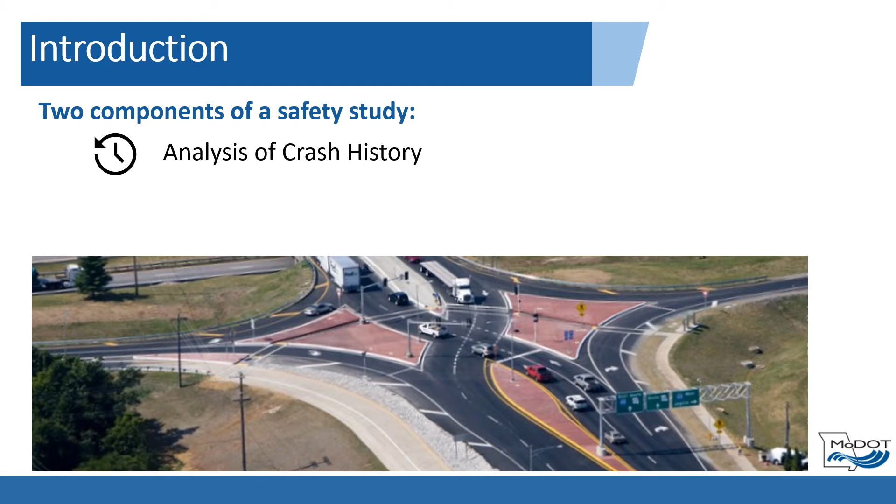There are two components of a safety study: an analysis of the roadway's crash history, and an estimation of future crashes.

The focus of this module is on estimating future crashes with an emphasis on utilizing safety models.

The following guidance is intended to serve as a resource for practicing MoDOT project managers and consultants when completing or reviewing TIAs when a future crash safety model component is included.

Reviewing TIAs when a future crash safety model component is included. These guidelines are consistent with the department's traffic safety standards of practice.

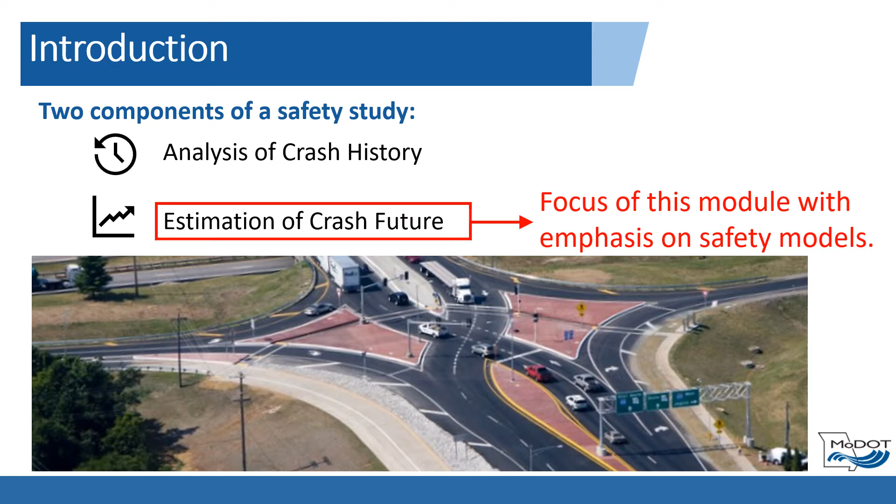Predictive safety analysis models are sometimes needed because historical crash data is not always available for TIAs.

Existing data may not apply to future conditions, especially for new construction projects, and an evaluation of impacts from proposed geometric or traffic volume changes is needed.

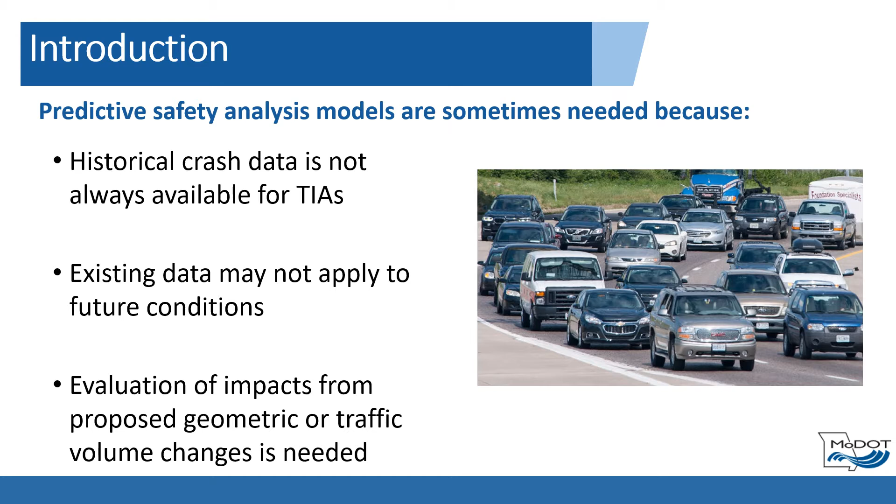The safety models in this module estimate future crashes by utilizing Part C of the latest version of the Highway Safety Manual, HSM. The HSM is based on estimating crashes as predicted or expected.

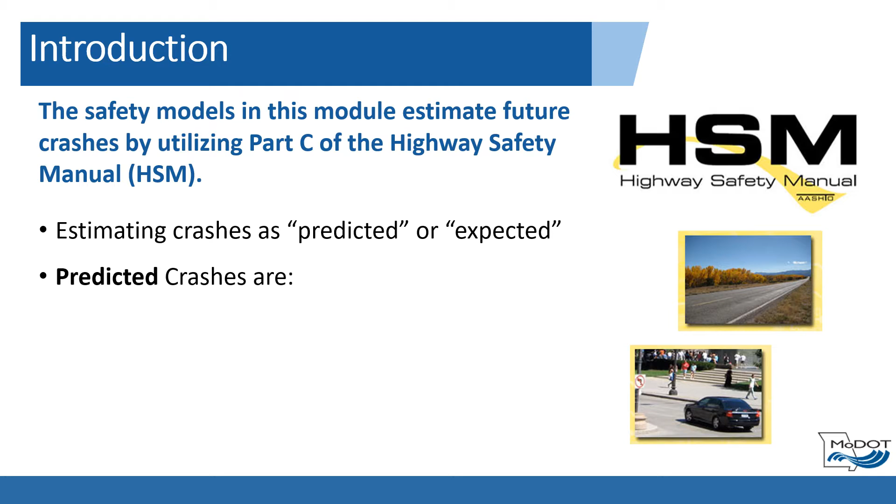Predicted crashes are based on the geometry, volume, and national patterns of crashes, and are calculated within these safety tools utilizing standard safety performance functions, known as SPFs.

Expected crashes are determined by adjusting the predicted crashes to include local crash history as a way to more accurately determine the modeled number of crashes.

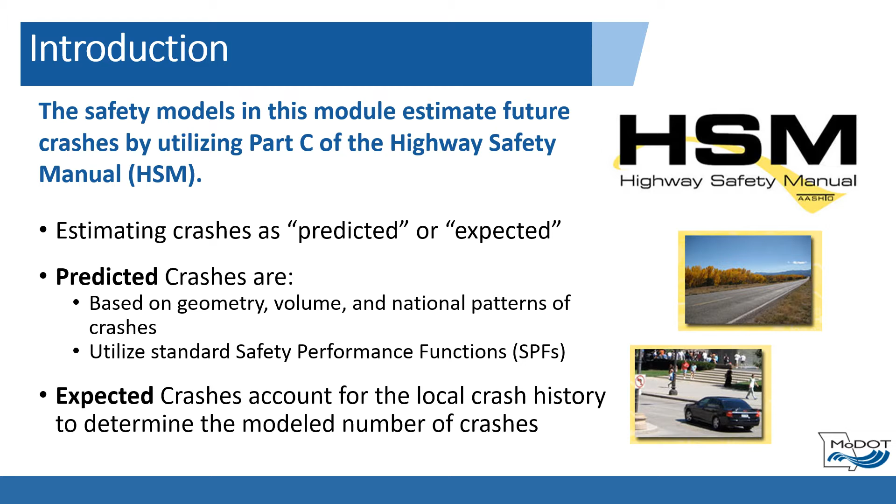Now that we've introduced estimating future crashes using safety models, let's discuss a few key safety models typically used by MoDOT. There are 4 safety models typically used by MoDOT.

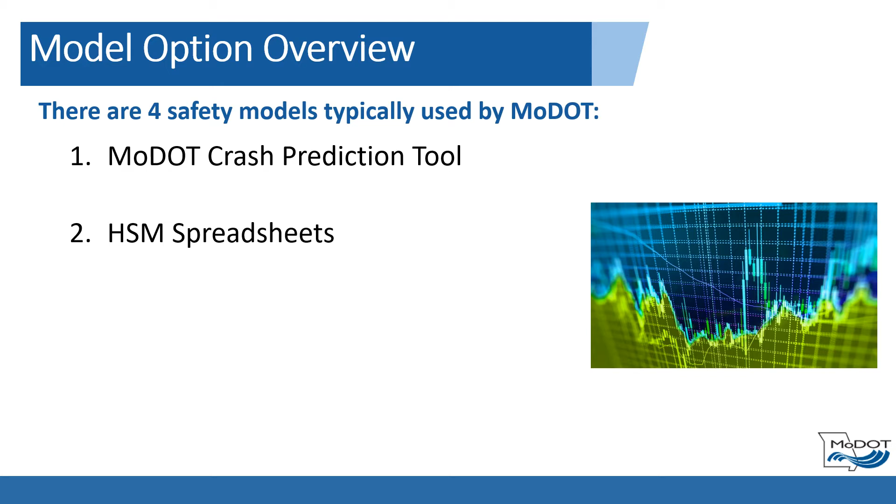MoDOT Crash Prediction Tool, HSM Spreadsheets, Interchange Safety Analysis Tool Enhanced (ISATe), and Interactive Highway Safety Design Model (IHSDM).

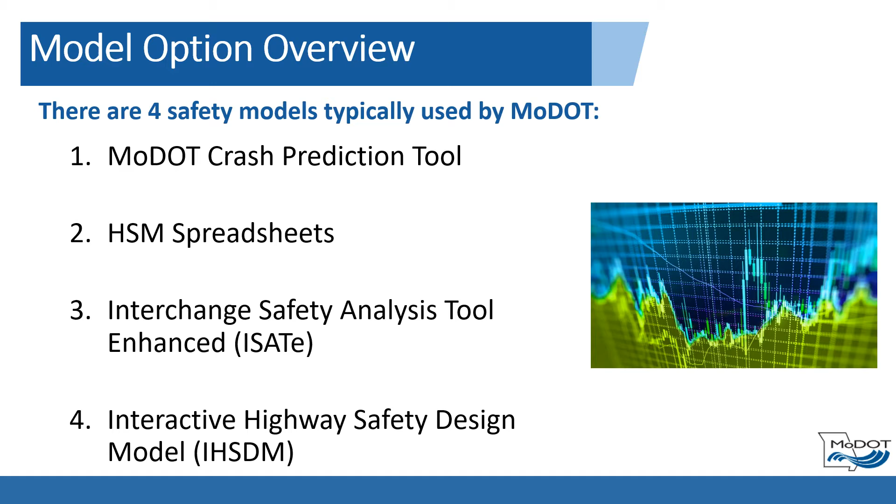The Crash Prediction Tool developed by MoDOT is available for internal MoDOT use only at the time of this publication. It allows for the analysis of rural 2-lane highways only and provides the potential for safety improvements within a corridor.

This is important because locations that could yield a high return on safety investments can be identified. For more information, discuss with MoDOT.

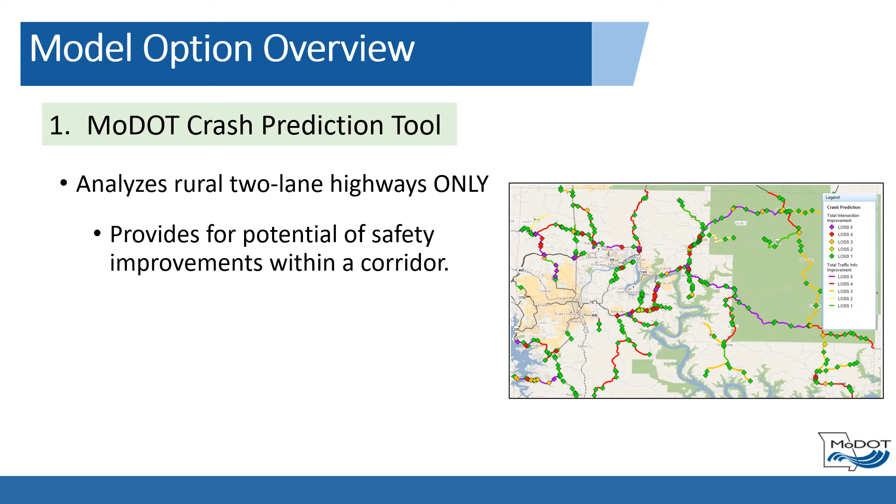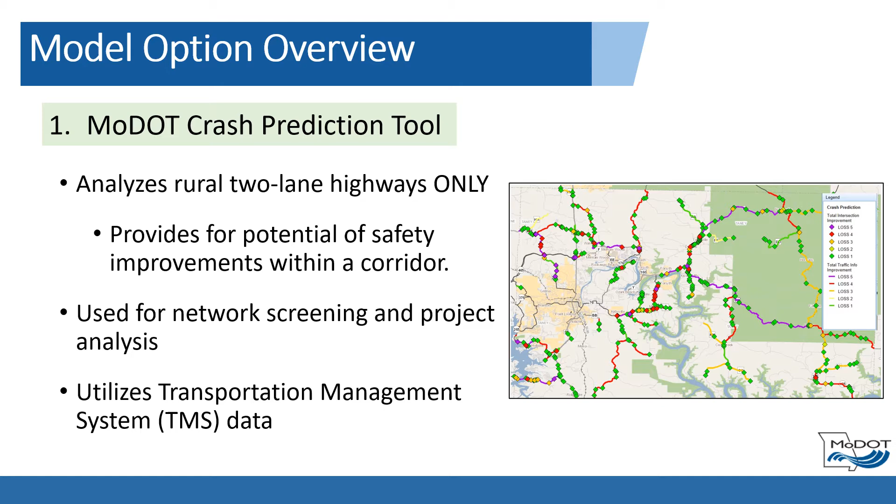The tool can be used for network screening and project analysis, and it utilizes Transportation Management System, TMS, data. The MoDOT Crash Prediction Tool also automates the analysis utilizing the HSM for the selected corridors.

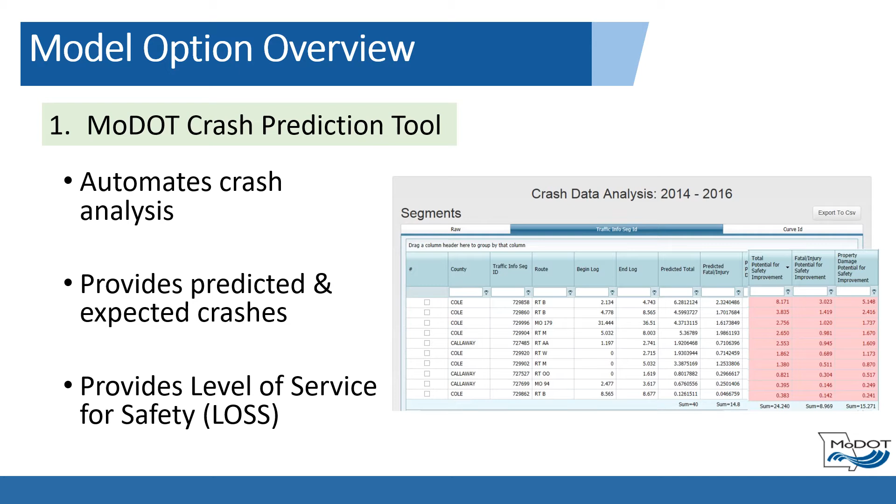So that it provides both predicted and expected crashes, and it provides the level of service for safety, LOSS. The HSM Spreadsheets provide high-level overviews of the expected and predicted number of crashes within a study corridor.

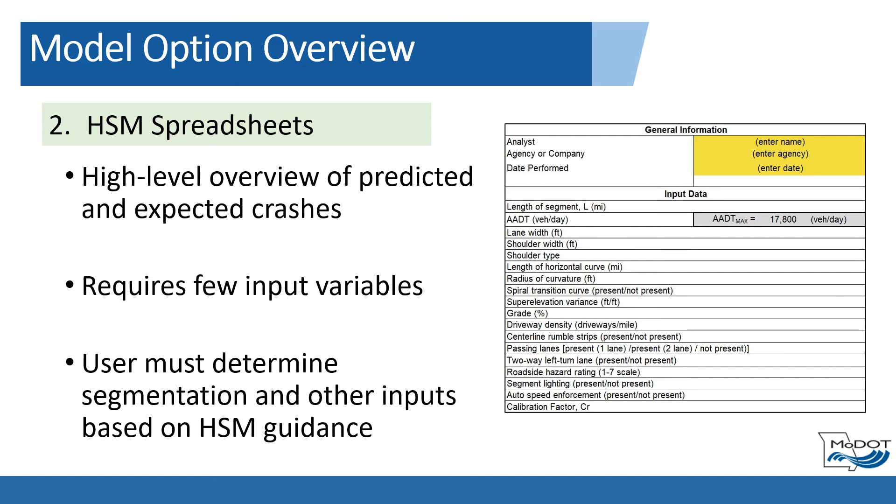These segments should be no less than 0.1 miles to minimize calculation efforts and not affect the results. Roadway segments begin and end at the center of intersections or where the roadway segment changes.

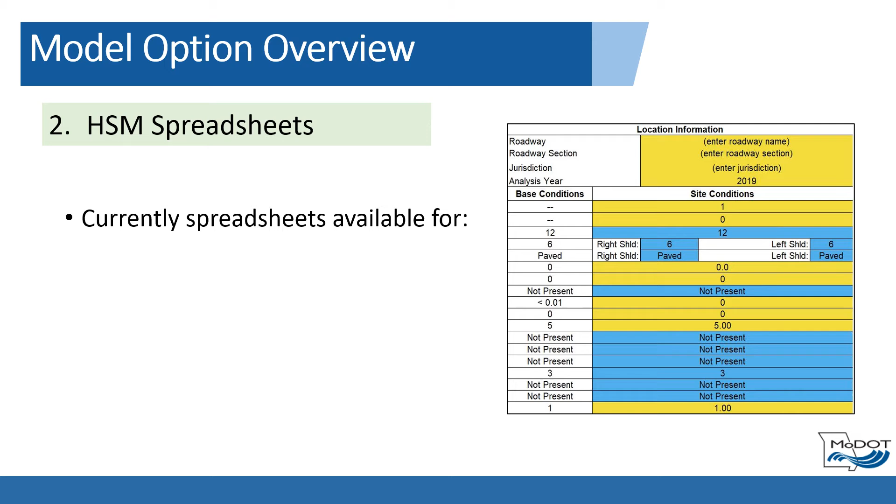Currently, various spreadsheets have been developed by different sources. As of the date of this material, there are spreadsheets available for rural 2-lane highways, multi-lane highways, and urban or suburban arterials.

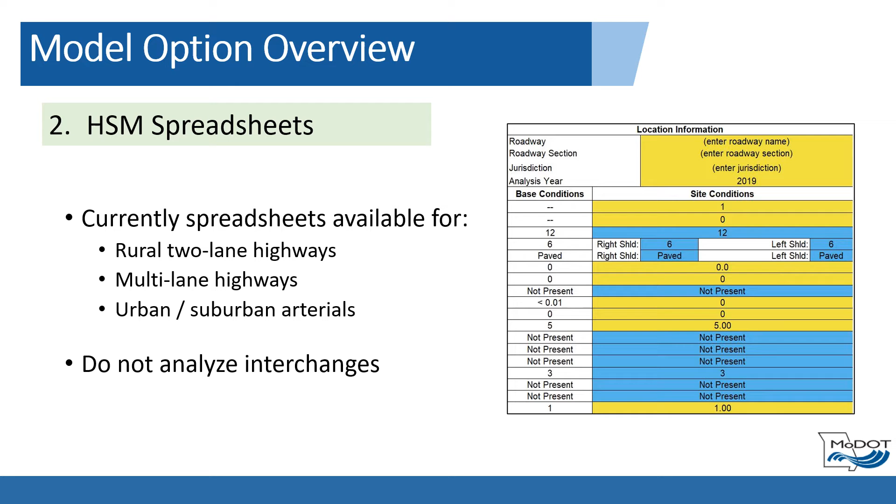HSM spreadsheets do not analyze interchanges.

ISATe, described in HSM chapters 18 and 19, is a specialized spreadsheet analysis tool that was developed to analyze freeways. This includes the freeway segments, ramps, ramp terminals, and speed change lanes that comprise a freeway.

ISATe requires more input variables than the HSM spreadsheets.

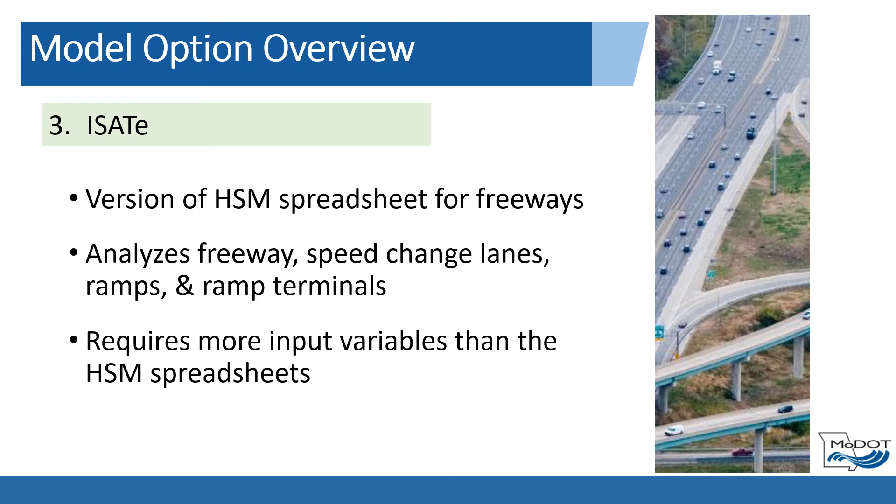ISATe can be used for most freeway corridor types, though certain situations may require another tool. The tool can be used in conjunction with other HSM spreadsheets if a local connecting road system needs to be analyzed as well.

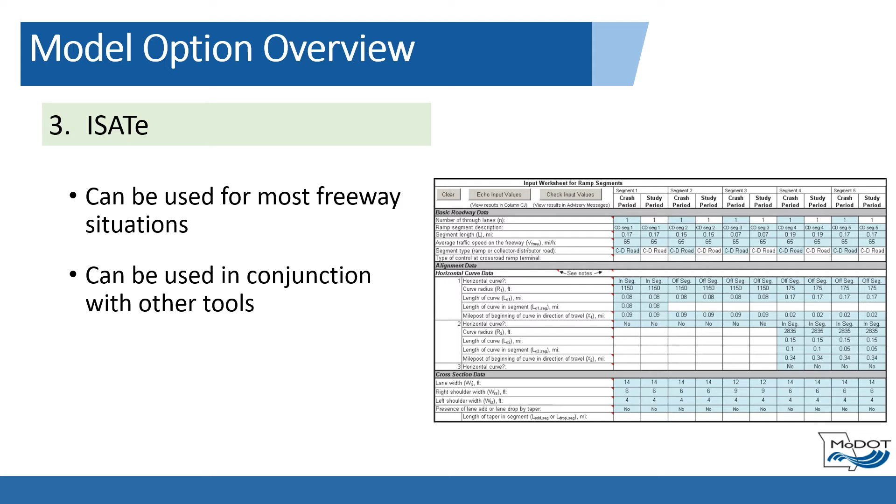Segmentation of the corridor utilizing ISATe requires the user to manually divide up the corridor for entry into the spreadsheet. Each segment should be uniform with respect to traffic volume, geometric design features, and traffic control features.

Key changes in characteristics such as the number of through lanes, lane width, shoulder, median width, ramps, or clear zone require a new segment to begin within the model.

More information can be found at the MoDOT EPG on ISATe, 905.3.6.2.5.

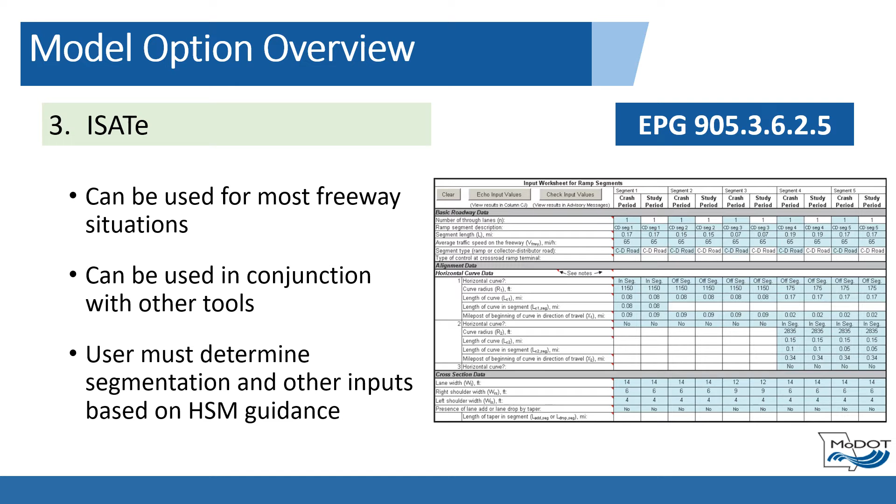IHSDM is a fully integrated safety modeling software with the capabilities of evaluating most types of facilities as an interconnected network. However, there are instances where HSM Part C does not apply to a real-world situation and cannot be modeled.

Refer to the HSM Part C. The tool requires a high number of user-defined input variables.

Using the HSM spreadsheets as the core function of the modeling software, the IHSDM automates the segmentation process and provides a visual representation of what is being modeled.

The user also has the option to import a LandXML file containing the horizontal and vertical alignment information for every roadway, which can greatly speed up the development and accuracy of the modeling output.

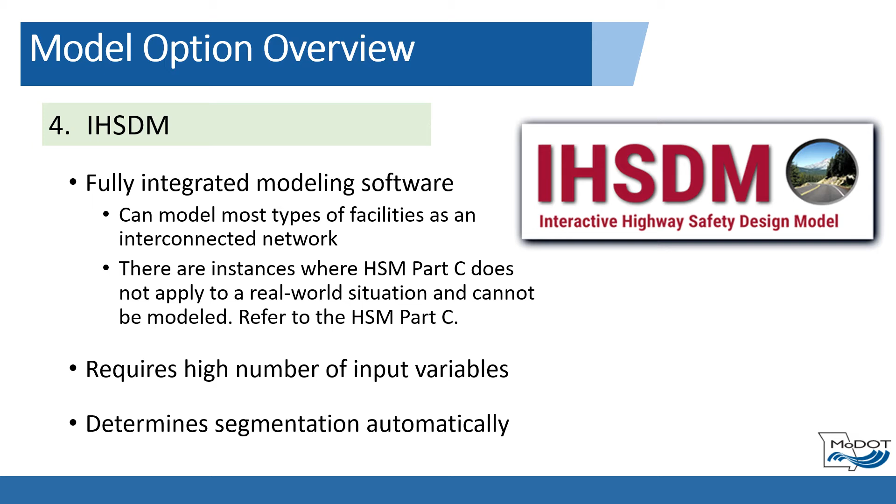Now that we've overviewed common safety models used by MoDOT, we can discuss where to find MoDOT calibration factors.

Parameters to be determined prior to completing an existing safety analysis include the following. MoDOT has a list of calibration factors that are available for reference in the MoDOT SharePoint library and are based on research documented on the MoDOT Research Publications website. The hyperlinks to these locations are available towards the end of this module under Additional Resources.

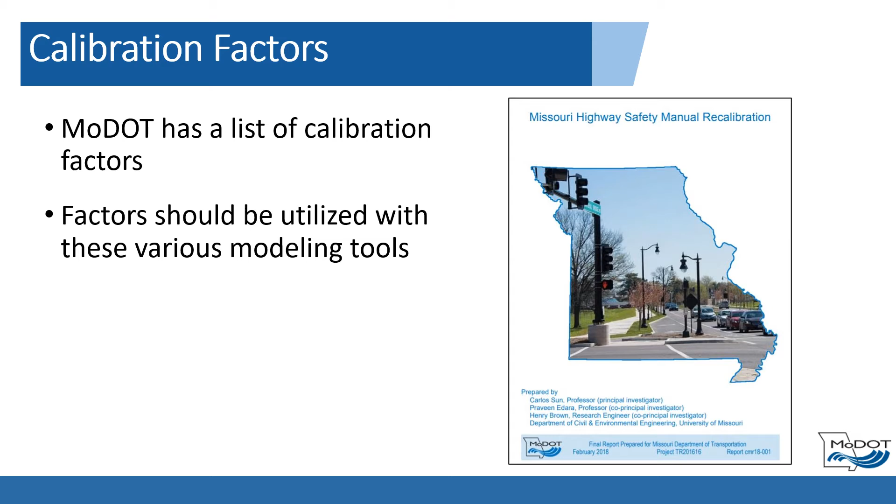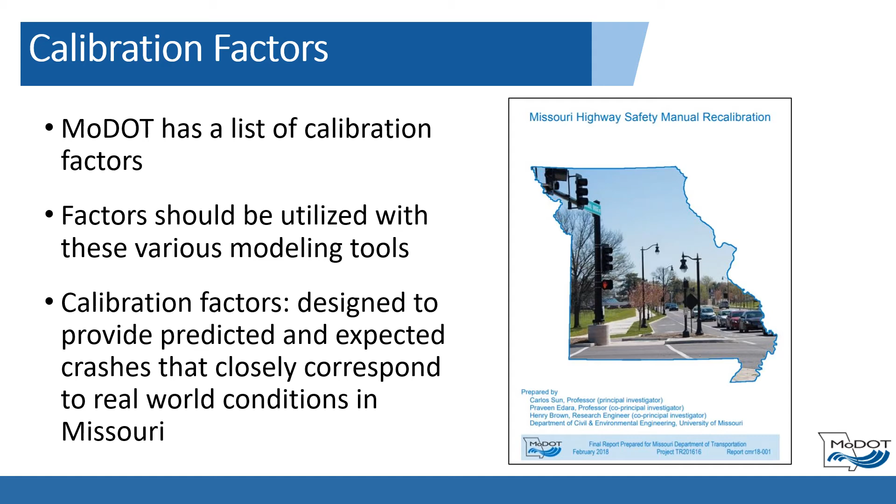The appropriate calibration factors should be utilized with these various modeling tools. The calibration factors have been selected to provide predicted and expected crashes that more closely correspond to real-world conditions in Missouri. Now that we've overviewed safety modeling calibration factors, we can discuss the typical analysis approach to overall safety modeling.

Various sources have developed each of these tools, though they all utilize the HSM to conduct their analysis. It is important to determine through consultation with MoDOT the appropriate tool and tool version for a specific project. The same version of the approved tool should be used throughout the entire course of the project, unless instructed to utilize another version by MoDOT.

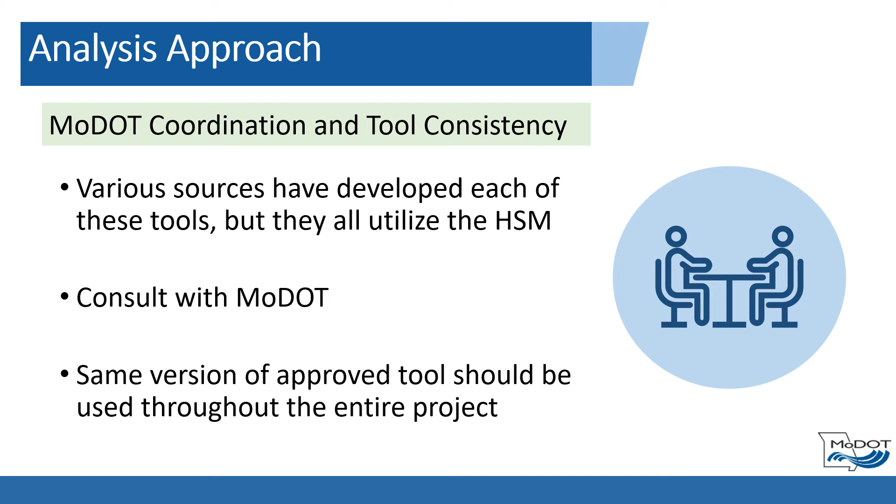Typically, the analyst should determine the future expected crashes and compare those to the existing expected crashes utilizing the appropriate modeling tool. This comparison approach allows for local crash characteristics to be taken into consideration when determining the effectiveness of proposed improvements. To determine the future expected crashes, the ratio of expected to predicted crashes under the existing condition should be determined and then multiplied by the number of future predicted crashes.

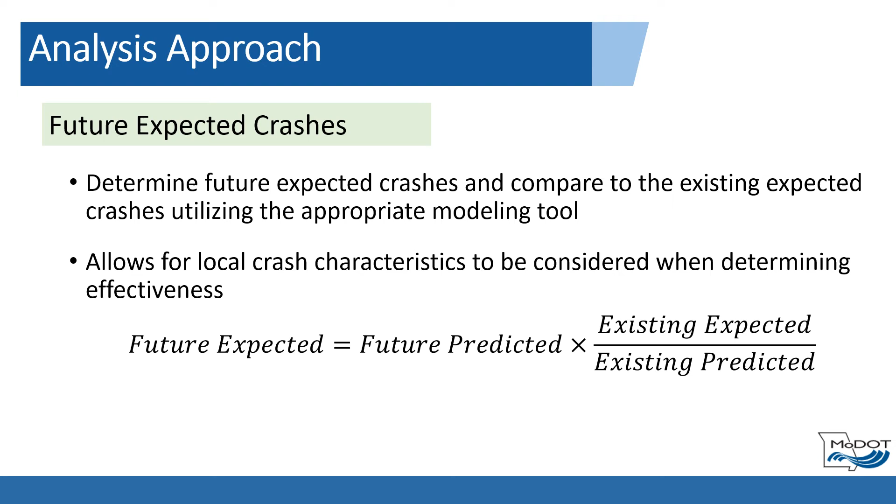This ratio can be utilized along with the future predicted crashes to extrapolate the future expected crashes. Professional judgment is needed to determine if one ratio is used for the entire project or if subparts of the project have and use separate ratios.

Note that the ratio method works well for roadway realignments or other adjustments that are factored into the HSM analysis tools. However, those do not account for all situations, such as enhanced signage or roundabouts. Refer to the Crash Modification Factor (CMF) module for additional information for anticipated crash changes for different transportation facility types.

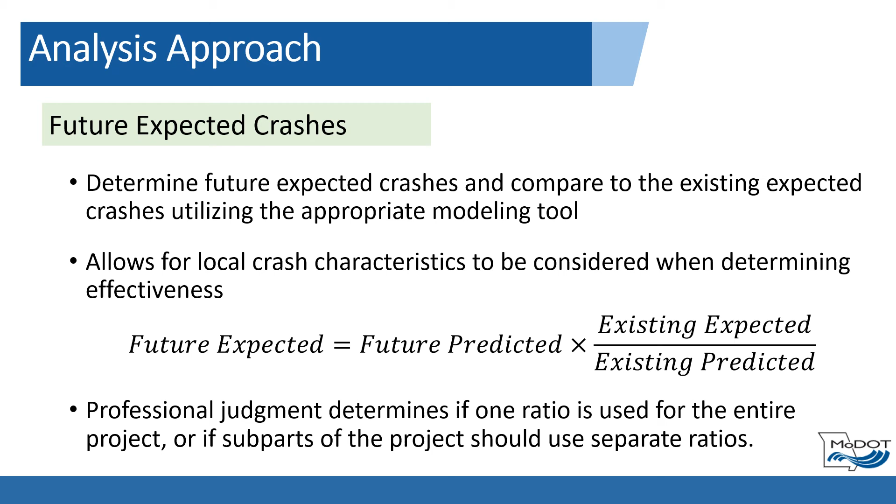Additional notes to be aware of for future crash safety predictions include: the overall context of crash analysis results should always be considered. Future crash predictions are for total crashes, and the severity of these crashes should not get lost in the analysis. Always be mindful of the existing crash history when determining appropriate countermeasures.

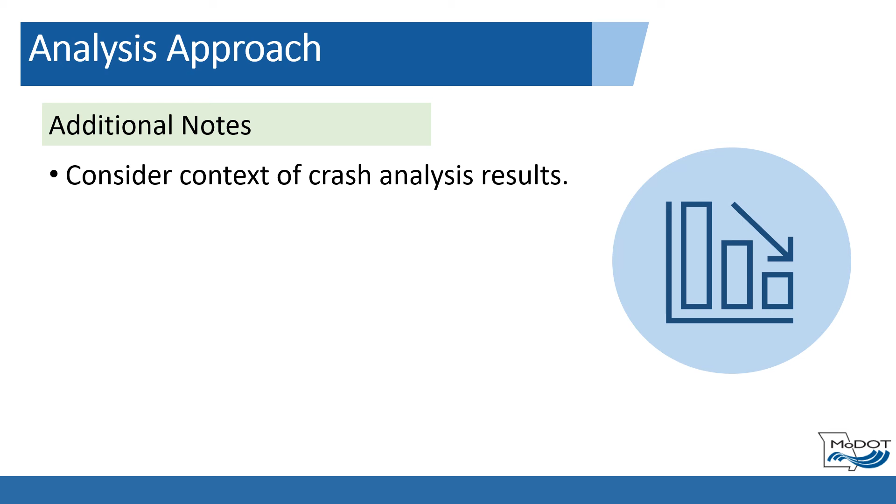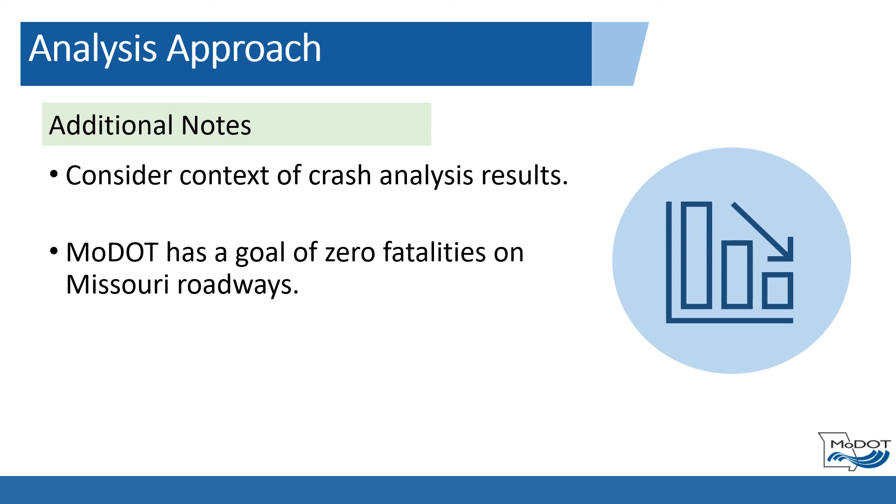MoDOT has a goal of 0 fatalities on Missouri roadways. The plan to achieve this goal can be found in Missouri's Strategic Highway Safety Plan titled Show Me Zero. The crash risk factors and potential systemic safety treatments should be considered, even if a crash may not have occurred.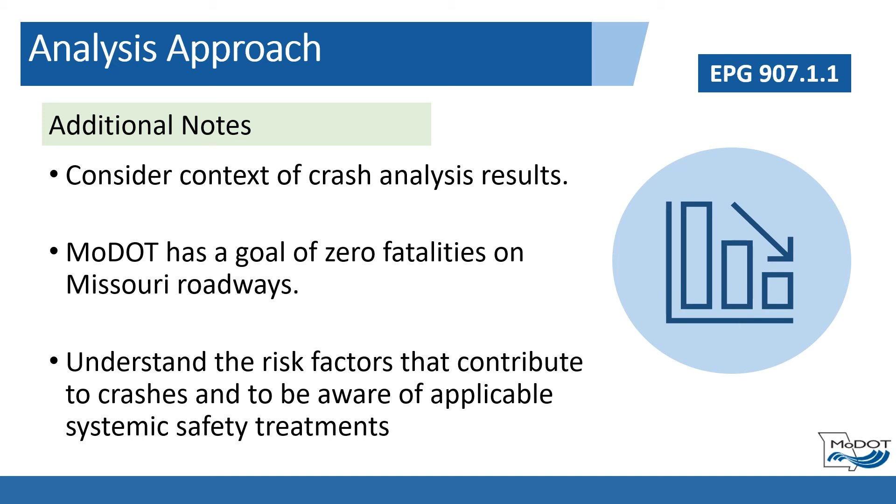For more information, refer to EPG 907.1.1 and Missouri's Strategic Highway Safety Plan.

Now, let's discuss key takeaways and additional resources. The revisited key takeaways from this module include the potential needs for safety analysis models, an overview of key safety models used in Missouri, where to find typical MoDOT calibration factors used in safety modeling, and the typical approach to completing a safety model analysis.

In addition to MoDOT EPGs, more information can be found in MoDOT research publications, the MoDOT SharePoint library, the AASHTO Highway Safety Manual, and various MoDOT and FHWA sites on the safety modeling tools.

Time to see what you know.

Question 1. What is a potential reason that could contribute to the need for a predictive safety analysis model? Is it A, historical crash data is not available? B, existing crash data is not applicable to future conditions? C, an evaluation of impacts from proposed geometric or traffic volume changes is needed? Or D, all of the above? The correct answer is D, all of the above.

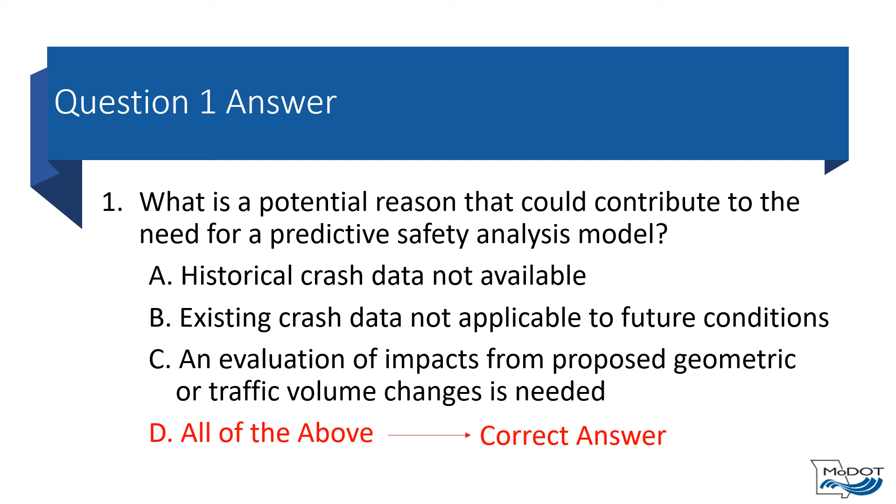Question 2, true or false? The 4 safety models covered in this module estimate future crashes by utilizing Part A of the Highway Safety Report. The correct answer is false. The correct statement is, the models estimate future crashes by utilizing Part C of the Highway Safety Manual.

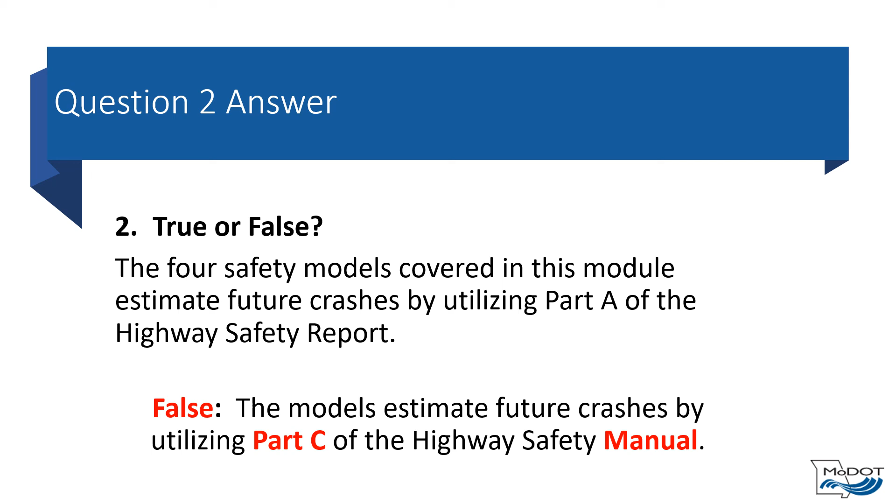Question 3, true or false? Predicted crashes are based on the geometry, volume, and national pattern of crashes. Expected crashes account for local crash history to determine the modeled number of crashes. The correct answer is true.

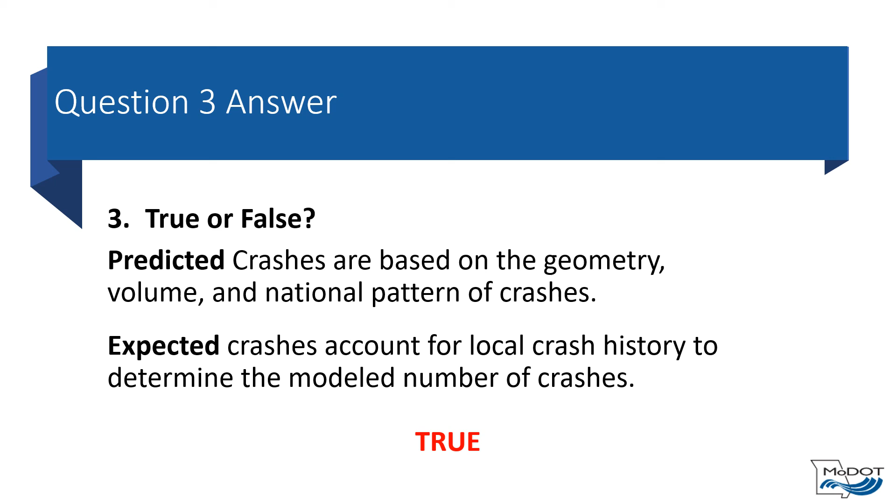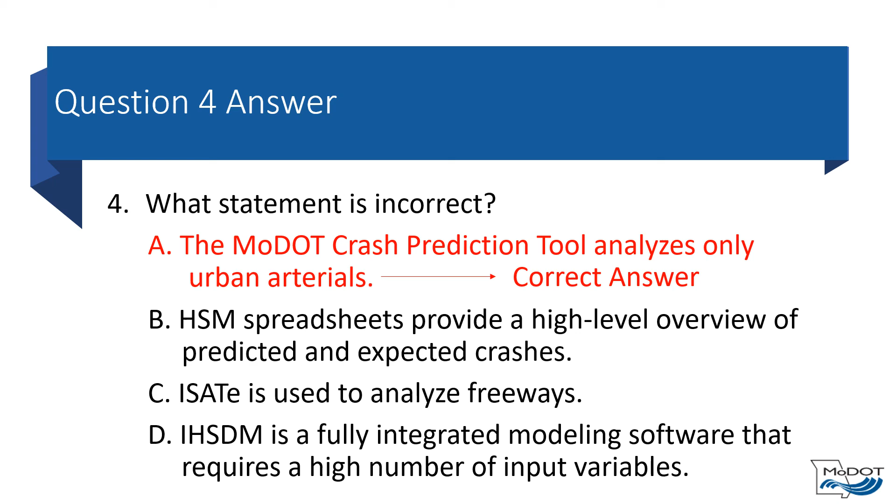Question 4. Which statement is incorrect? The MoDOT crash prediction tool analyzes only urban arterials. HSM Spreadsheets provide a high-level overview of predicted and expected crashes. ISATe is used to analyze freeways. IHSDM is a fully integrated modeling software that requires a high number of input variables. The correct answer is A. The statement should have stated, MoDOT crash prediction tool is used to analyze only rural 2-lane highways, not urban arterials.

Question 5. What would be included in a typical safety modeling scenario? Is it A, existing predicted and expected crashes? B, ratio of existing expected to existing predicted crashes? C, proposed improvements to determine future predicted crashes? D, comparison of estimated future expected crashes to the existing expected crashes? Or E, all of the above? The correct answer is E, all of the above.